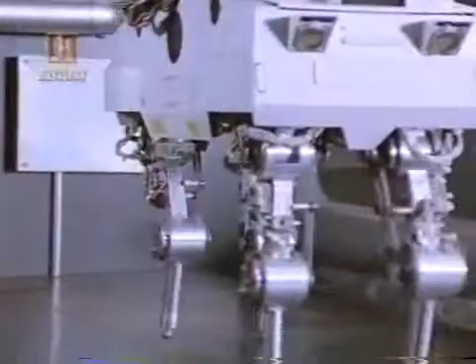Estos son los robots del siglo XX. Magníficas máquinas que han salido de las páginas de la ciencia ficción para adentrarse en nuestras vidas. Actualmente muchos robots trabajan para nosotros. En las fábricas, estos obreros de acero laboran sin descanso y desempeñan tareas de precisión, guiados por sentidos muy desarrollados, como la vista y el tacto. Otros robots se aventuran valientemente en ambientes hostiles, desempeñando trabajos desagradables, demasiado peligrosos para ser realizados por el hombre.

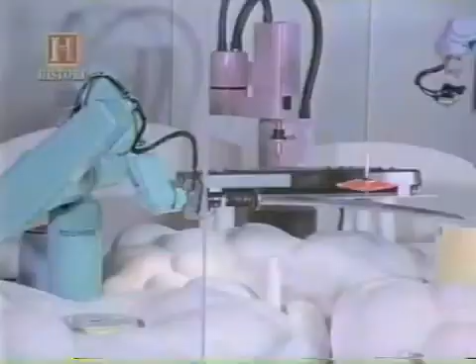Los robots también son construidos para entretenernos y asombrarnos. Cada vez más se parecen a sus creadores y actúan como ellos. A medida que los científicos continúan creando robots más inteligentes y ágiles, se hace más claro que estas inteligentes máquinas tendrán un profundo efecto en nuestro futuro.

Pensamos en los extraordinarios avances en la robótica como un producto de los recientes adelantos en la tecnología y la computación. A pesar de que la palabra no ingresó en nuestro vocabulario sino hasta los años 20, estos robots han estado evolucionando durante miles de años, a medida que el hombre se ha esforzado por crear máquinas a su propia imagen, para trabajar, entretener y para que permanezcan como servidores y no se conviertan en amos.

La primera criatura con aspecto de robot data de hace aproximadamente 5000 años, cuando los sacerdotes manipulaban fraudulentamente estatuas religiosas con movimiento en los labios y tubos parlantes para impresionar a sus asombrados seguidores.

As part of religious practice, going back thousands and thousands of years, there's normally been some kind of oracle, some sort of seer, that gives you predictions about the crops or the weather or whether the king will die. And these figures had to come at you in some sort of secretive, magical way. And the Egyptians did this with an Anubis, which is kind of a wolf-like face with an articulated jaw. The articulated jaw could be manipulated by the priest behind the Anubis, and then the priest could talk through a tube in through the Anubis's mouth.

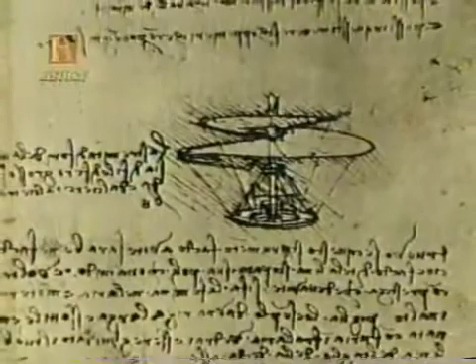En el siglo XVI, Leonardo da Vinci llenó sus libros con principios mecánicos que posibilitaban la creación de autómatas y dijo haber creado un león mecánico para el rey Luis XII. En 1580, el rabí Judah Loew creó el legendario Golem para proteger a los judíos de Praga. La historia dice que construyó una figura de barro extraído del río Moldavia y le dio vida. Sin embargo, con el tiempo el golem sufrió un ataque de locura y tuvo que ser destruido.

Por supuesto, gran parte de la historia es mito, pero el tema se convirtió en elemento permanente durante siglos de los cuentos populares sobre robots.

Para el siglo XVIII, la tecnología de los relojes y cajas musicales había sido perfeccionada, y los inventores y científicos se inspiraron en estas intrincadas máquinas. It's hard for us to imagine how amazing it was when somebody came up with a clock that could tell time by the minute. And then what else could a machine do, a mechanical device? And the imagination just went wild.

El artesano suizo Pierre-Jacques Droz y otros utilizaron estas técnicas para construir complejos autómatas que ejecutaban instrumentos musicales y realizaban pinturas. Estas ingeniosas máquinas operaban con levadores de bronce finamente labrados. Con el cambio de los levadores en los dispositivos se alteraban los movimientos del autómata, lo cual dio origen a las primeras máquinas programables.

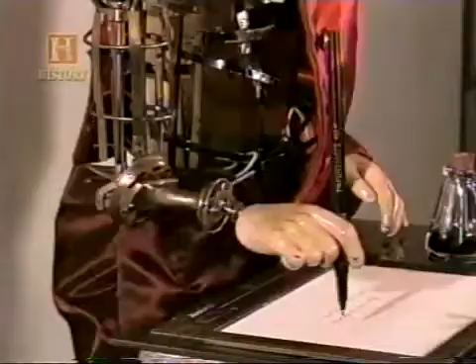This automaton is particularly interesting in that it has the largest vocabulary of any of the machines that survive, and we think the largest one of any that was ever built. It knows how to write three poems and can draw four pictures.

One of the poems is in English, but two of them are in French, because this machine was designed to travel all over Europe to sell tickets to pay for itself.

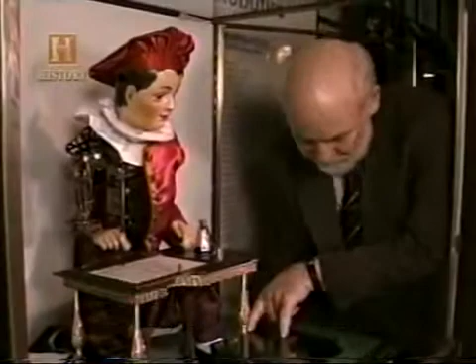It has two motors and two springs, each of which has the kick of one leg of a mule. So you add them together, and it's a full mule kick—both hind legs off the ground, flying at you.

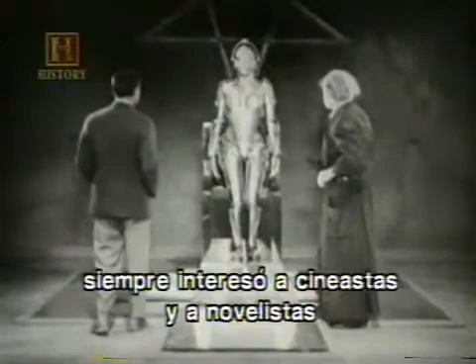The idea of a mechanical person was always interesting to the movie makers and to the storytellers, because when you have a mechanical being, it becomes soulless. And if it's soulless, then it can be ultimate evil.

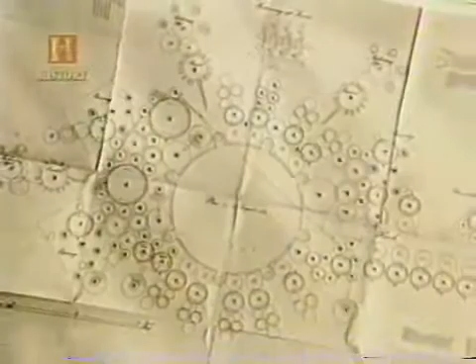En 1833, el inglés Charles Babbage construyó la primera computadora. Su motor analítico era un dispositivo mecánico trabajado con engranajes y elevadores de bronce. La máquina estaba diseñada para almacenar y calcular 1050 dígitos.

Pero esta era la época de la electricidad. El chispazo que trajo el monstruo de Frankenstein a la vida estaba entonces dando vida a autómatas realistas. En 1876, una banda automática de tamaño real interpretó un número para la entusiasmada audiencia.

Para finales de 1800, Thomas Edison utilizó la tecnología desarrollada para su nuevo fonógrafo con el fin de producir muñecas parlantes que cantaban María tenía un corderillo. El popular invento de Edison puso en marcha una nueva industria de juguetes parlantes.

Entretanto, George Moore exhibía la primera máquina bípeda. Su hombre de hojalata caminaba en círculos impulsado por un motor a vapor de medio caballo de fuerza. La visión de crear robots con forma humana estaba cada vez más cerca de la realidad.

Durante el siglo XX, los escritores y directores cinematográficos de todo el mundo continuaron con el tema de las máquinas fuera de control.

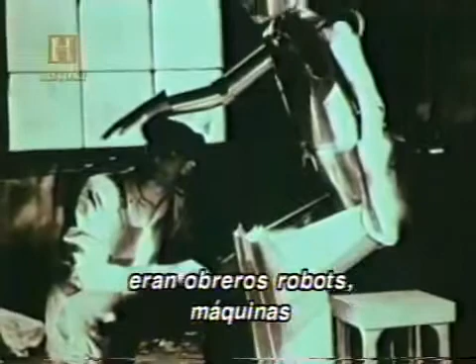Robota is the Czech word for extremely hard labor, basically slave labor. The primary characters in RUR were robot workers, machines made to work extremely hard, and the play involved them being exploited mercilessly by the factory owners, and eventually they revolted and destroyed humanity. RUR did set a tone for how the West at least views robots.

Fue entonces cuando en 1926 la película clásica de Fritz Lang, Metrópolis, se convirtió en un éxito internacional al mostrar temas similares a los de RUR.

Metropolis was the 1926 masterpiece by Fritz Lang, which took place in the year 2026, exactly 100 years from when the film was actually made. And you had the beautiful city, all the beautiful people, the beautiful architecture and everything, but really underneath the city you had these oppressed workers who were really responsible for all this lavish lifestyle.

Para controlar a los trabajadores, los dirigentes de la ciudad crearon un robot que se debía infiltrar en la fuerza laboral. Ellos dieron vida a la máquina, transfiriéndole el alma y el aspecto del personaje humano María. Una vez más, el científico maligno y loco construye un renegado y desalmado robot para esclavizar a los seres humanos. Metrópolis se convirtió en el prototipo de las películas de ciencia ficción y horror de los 50 años siguientes.

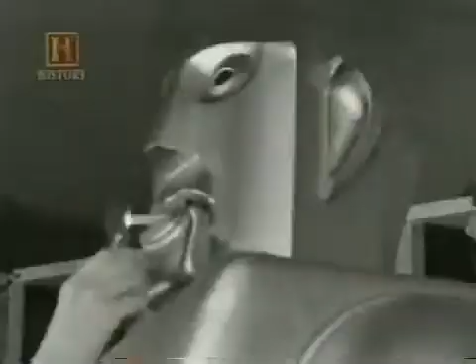El ingeniero de Westinghouse, J.M. Barnett, diseñó la máquina de 130 kilogramos para demostrar las maravillas del control eléctrico. Electro operaba con 11 motores, 48 servomotores y una serie de fotocélulas y ojos eléctricos similares a los dispositivos utilizados para abrir las puertas de manera automática.

Sin embargo, el robot no era tan inteligente como aparentaba, ya que el discurso era realizado en su mayor parte por un hombre escondido detrás de la cortina.

Quiet, please. I'm doing the talking. That's the most remarkable thing I've ever seen.

In the 1939 World's Fair, I personally saw Electro, and it was an amazing experience because we didn't know what that robot was. We thought the robot could answer our question. I asked when the oil reserves of the world would give out, and it answered my question, and it was very spectacular.

En 1940 se le adjuntó a Electro un fiel perro llamado Sparko. Ambas máquinas continuaron asombrando al público.

They were a lot of fun, and they completely captured the imagination of everyone who saw them. You have to remember, we didn't have Star Wars and Star Trek and Forbidden Planet and all that back then, in the 30s and 40s. I mean, people were just, wow. And I think it helped promote the image of science fiction and robots and the future very effectively.

La amistosa apariencia de Electro y Sparko contribuyó a popularizar una nueva y positiva visión de los robots, los cuales permanecían bajo el control humano. Este concepto se consolidó en nuestra cultura por medio de las revolucionarias obras de Isaac Asimov.

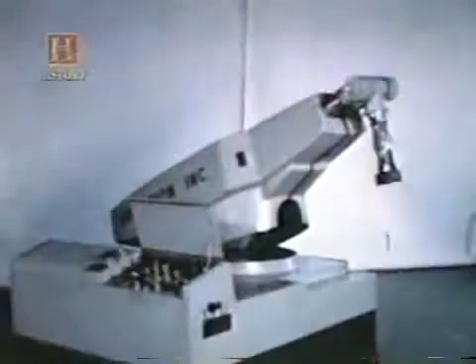Si el robot industrial tiene un árbol genealógico, sus raíces están firmemente plantadas con este hombre. George Devol es conocido como el abuelo de la robótica. Esta es su patente, registrada en 1954, el anteproyecto para la máquina que revolucionaría la historia.

This is the kind of a job that a man normally doesn't like to do. It's really terribly hot in those forging operations.

Devol, un prolífico inventor, también responsable por el código de barras y la puerta eléctrica, se asoció con el ingeniero Joe Engelberger, ahora conocido como el padre de la robótica. Joe relata cómo todo comenzó en un cóctel.

We got talking in a corner, and I think we also got into our cups. Talking about it, I said, gee, that sounds like a very good idea. I think the patent makes sense to me. What are you doing with it? And he said, well, no one's paying any attention to me. So I said, let me have a crack at it, let me see if I can't find the financing. And in the cold gray dawn with a hangover, it still looked like a pretty good idea.

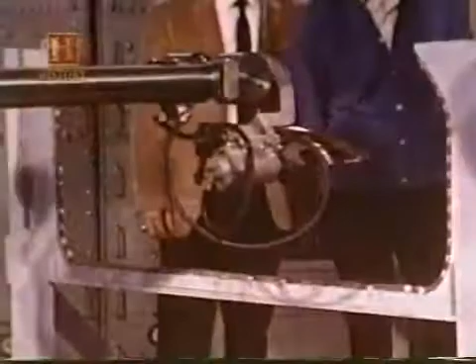Ambos hombres tenían fe en la idea, pero resultó muy difícil convencer a las empresas para que financiaran el proyecto. When we built the first industrial robot, to get the financing, I visited 46 different companies before I could find someone who believed it was even possible to do such a thing.

A pesar de que llevó años de trabajo y recaudación de fondos, el anteproyecto de George Devol fue llevado a la vida robótica en 1961. La nueva compañía fue llamada Unimation y el robot Unimate.

Automation's newest contribution to man. This jack-of-all-trades robot is called Unimate, and it handles dull, difficult, or dangerous jobs with equal aplomb.

Ese mismo año, la General Motors adquirió el primer Unimate y lo colocó en una planta de Nueva Jersey para manejar las piezas incandescentes de una máquina de fundición. La automatización no era nueva para la industria automotriz, pero esto era algo diferente. El Unimate creó la definición del robot industrial.

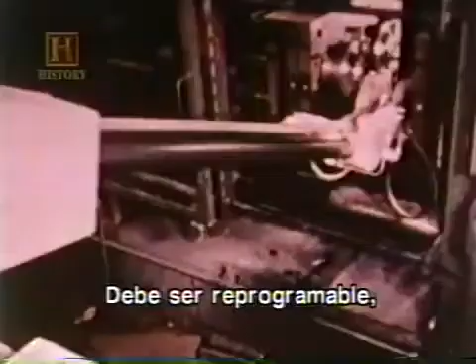An industrial robot is something that has at least 3 degrees of freedom, which means 3 axes that can move independently. It has to be reprogrammable, and it has to be able to perform different tasks. And that's the universally agreed definition today.

The original Unimate had an awful lot of the major qualities that all industrial robots have today. It had to have a memory, it had to remember up to 100 different steps. There's 100 different things in a row it could do.

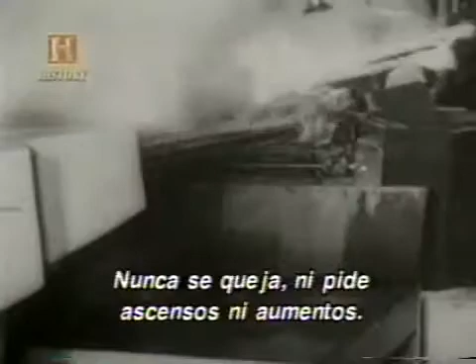He has muscle, can pick up 75 pounds, and can stand extreme heat, cold, noxious odors, toxic gases, and radiation. He never complains, asks for a promotion, or demands a pay raise. He doesn't break, bend, or burn, and should make some other Unimate a perfect husband. Or maybe wife?

Esta era una máquina primitiva que pesaba 1000 kilogramos, impulsada por medios hidráulicos, con la memoria almacenada en una bobina magnética de metal. Su sistema nervioso era operado por retroalimentación o servomecanismos, los cuales miden dónde se encuentra el robot en el espacio. Cuando éste alcanza su punto programado, entonces ejecuta su próxima maniobra.

Otra innovación fue el efector terminal, la mano del robot. Esta es la parte de la máquina que se relaciona con sus alrededores. Cada una es diseñada para realizar un trabajo específico, como soldar, perforar, pintar y asir.

End effector is another word for tooling. Now, the tooling can get pretty sophisticated because some of the tooling has sensors built into the clamp, let's say, that will allow it to exert just so much pressure on something.

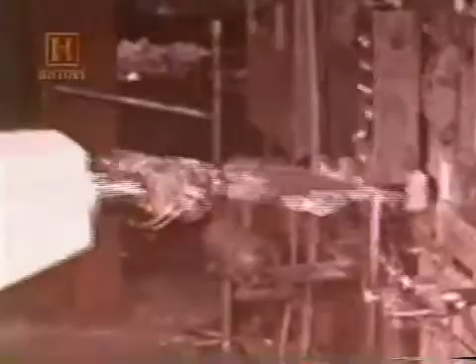Sin embargo, aparte de General Motors, los compradores de los nuevos robots eran escasos. If you don't understand something, and to try to get a normal businessman to understand a robot, he thought you're talking about science fiction or something like that.

Los cuerpos directivos se mostraban escépticos, los compradores temerosos. Los ejecutivos corporativos creían que los robots no funcionarían, mientras que los empleados temían que trabajaran demasiado bien y que los reemplazaran. No obstante, los robots realizaban en especial los trabajos que la gente no quería desempeñar. De hecho, los robots generaron empleo. Era trabajo de humanos diseñarlos, construirlos, operarlos y repararlos.

So they're able to use the kind of brain power that they have. Like one of the people that went to one of our classes learning how to program robots came out of it and said, gee, now I can finally use my brains for this company I've been working for 20 years instead of just my muscles.

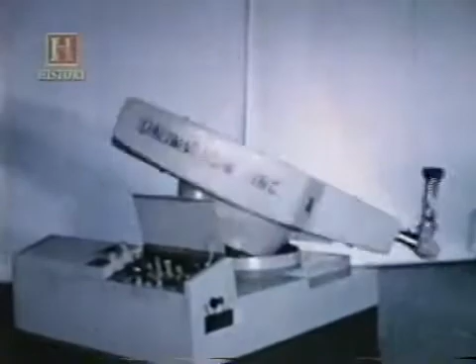Para mediados de los 60, incluso los sindicatos laborales respaldaron a los robots y reconocieron el inevitable incremento en la productividad. Aún así, el Unimate original, con un precio de $18,000, siguió teniendo dificultades de venta. What we did to get people started, we would rent the robot.

You'd hire it like a person. And we would say, at that time, it's so many dollars an hour—I think $6 an hour for the first shift, and $3 an hour for the second shift. So your labor gets cheaper. The robot had one advantage immediately: it could work 3 shifts, or 24 hours a day.

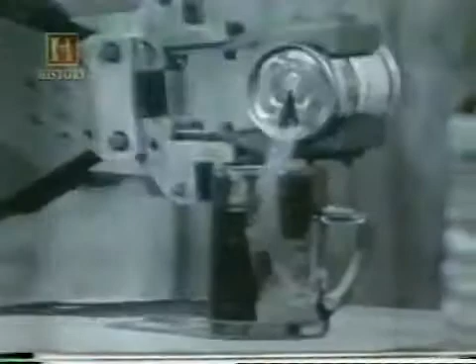And three, it could lead the orchestra. Now, what he's doing now is to program what he's going to have the machine do. He's putting this information into the machine. And that gave me a chance to show how the arm moved with a baton. Take it on the downbeat.

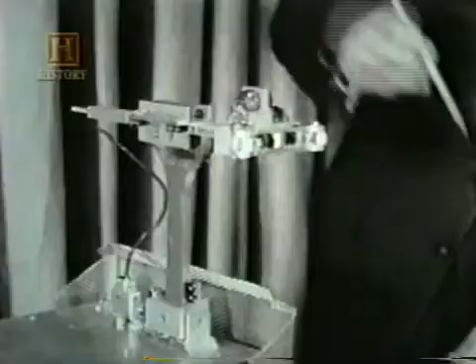During the working day, most office doors are left open. It is desirable not to allow the device to enter these offices, and it must therefore sense the door jamb, bridge the open door, and regain acquisition with the wall.

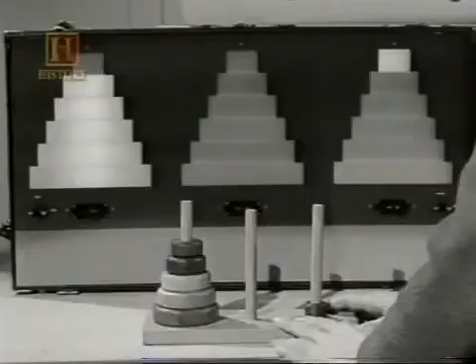Esta conferencia permitió a los investigadores de la IA del Instituto Tecnológico de Massachusetts sentar las bases para las máquinas pensantes computarizadas. Diseñaron programas para que pudieran jugar ajedrez, reconocer formas distintas y resolver problemas de lógica.

Claude Shannon realizó un extraordinario experimento llamado el ratón en el laberinto, que significó un gran aprendizaje. Guiado por un imán eléctrico motorizado, su trayectoria era registrada por una computadora que solo conservaba las partes exitosas de la travesía. En su segundo intento, el ratón encontraba su objetivo en una fracción del tiempo anterior.

En 1963, McCarthy se trasladó a la Universidad de Stanford, donde estableció el Laboratorio de Inteligencia Artificial.

One of the major things that we undertook to do was robotics, and in particular computer vision in connection with robotics.

Los investigadores de la IA consideraban que, para que la ejecución de los programas se asemejara más a las actitudes humanas, necesitaba ser combinada con accesorios que permitieran ver, escuchar y sentir. Los brazos del robot anexados a cámaras de televisión podían desempeñar tareas muy rudimentarias, tales como mover bloques de colores.

Sin embargo, una desagradable paradoja se hacía evidente. Si bien una computadora con inteligencia artificial podía fácilmente sobrepasar el desempeño humano en cálculo, cuando era acoplada a un accesorio mecánico, escasamente podía alcanzar la coordinación entre la mano y el ojo de un niño que comienza a gatear. Otorgar a un robot las percepciones sensoriales básicas que nuestro cerebro realiza sin esfuerzo es una tarea muy dificultosa.

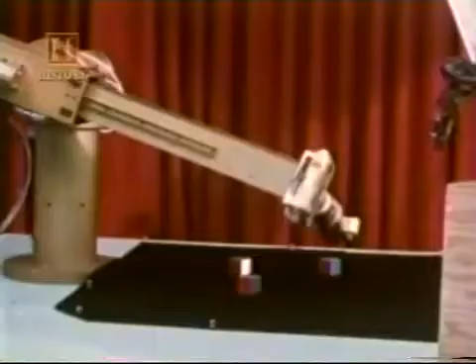In hindsight, of course, it's obvious that those are actually the hard parts, because those are the things that human beings have done as a life or death matter for most of our evolution.

Sin embargo, mientras otros laboratorios luchaban con estos problemas, el Laboratorio de Investigaciones de Stanford hizo historia en 1969 al crear a Shakey, el primer robot móvil casi racional.

Con una altura de 1,50 m, Shakey era guiado por 2 motores. Tenía una cámara de televisión y una radio conectada a una computadora fuera de borda. Podía transportarse y mantener el curso de su posición y velocidad contando las revoluciones de los engranajes.

We wanted a system to be able to learn a little bit about its world, make a map, use that map to figure out how to make motion throughout its world, how to move.

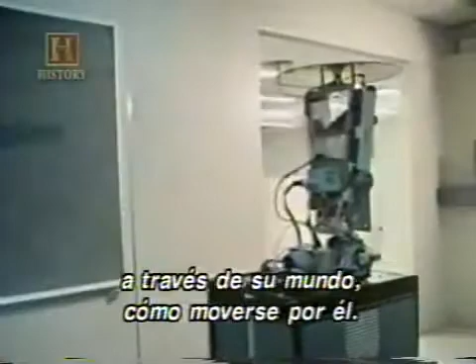Dado que carecía de un sistema de visión compleja, el mundo de Shakey era un ambiente de simples formas geométricas, que deliberadamente hacía más fácil el desempeño de funciones más complejas de aprendizaje y planificación.

Shakey podía realizar tareas simples, tales como mover un bloque de un lugar a otro. Desde un comando general, Shakey podía estimar las condiciones del mundo a su alrededor y deducir lo que necesitaba hacer para completar la tarea.

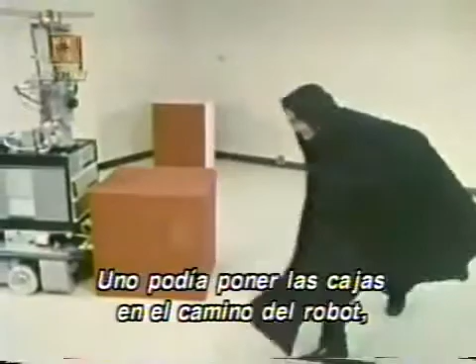And in fact, it worked very well. You could go in and move the boxes while the robot was performing some plan. It would recognize that things were going wrong. It would replan, and it would figure out what to do again.

Just a phenomenal idea. We put together a component in the area of computer vision, in the area of planning, and we put these together into a system that functioned smoothly, all as one integrated device. I think that was probably the first time that so many different components, so many different parts of artificial intelligence were put together into one system.

Pero a pesar de que el cerebro de Shakey era impresionante, la espontaneidad no era su punto fuerte. Cada movimiento tardaba más de 1 hora en ser computado y aún así existían grandes probabilidades de fallar.

A principios de los 70, la Universidad de Stanford confrontaba problemas con su vehículo robótico, pues no podían mantenerlo bajo control.

El laboratorio de inteligencia artificial estaba experimentando con la famosa carreta de Stanford, un robot móvil, el cual, a diferencia de Shakey, podía ver y transportarse en cualquier ambiente.

The cart had on it a television camera, and we illegally used an unused television channel, and we used a model airplane type controller to get the information back to the cart.

De 1971 a 1979, los estudiantes de la IA, como Hans Moravec, diseñaron programas que desarrollaron la carreta a partir de un vehículo débilmente consciente para convertirla en una máquina capaz de trazar su trayectoria gracias a la configuración del horizonte.

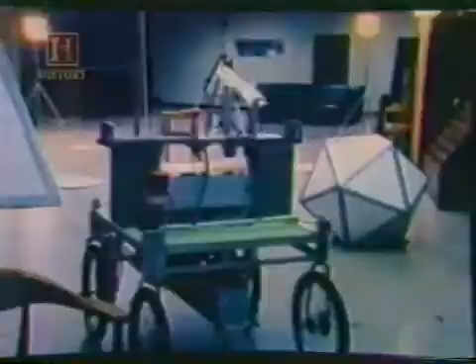La carreta tenía una cámara que tomaba una serie de 9 imágenes, a partir de las cuales medía la distancia de un objeto, utilizando 9 coordenadas separadas.

Su desempeño, sin embargo, aún no era perfecto. Un buen día, en 1979, cruzó un espacio obstruido de 30 metros, aunque le tomó 5 horas hacerlo.

Los investigadores de la IA se desconcertaban constantemente ante la amarga realidad de la tecnología actual. No obstante, los adelantos en el procesamiento de computadoras produjo avances.

Flakey, el hijo de Shakey, fue creado en el SRI a finales de los años 70. Dando vueltas por el SRI como un pariente lejano de Arturito, Flakey incluso podía interpretar pequeñas órdenes de su amo y ejecutar una acción apropiada.

I want Leslie to have the bagel. Enter. I want Leslie to have the bagel. Finished successfully parsing sentence.

El dueño solo dijo que quería que Leslie tuviera una rosquilla. Flakey razonó que debía encontrarla y entregarla.

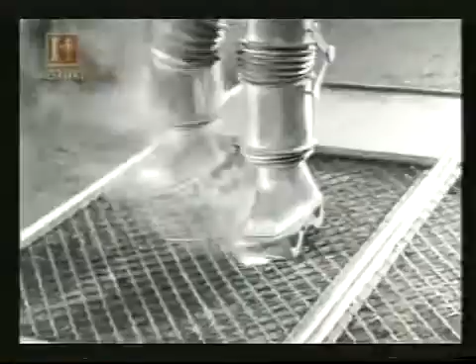Los hombres mecánicos construidos durante este periodo, como el robot del ingeniero suizo Peter Stern, eran poco más que sofisticados autómatas, parientes cercanos de Electro y Sparko, creados en décadas anteriores.

Sin embargo, poco a poco los investigadores perseguían el sueño de un robot que fuera semejante a los humanos. En la década de los 50 se crearon brazos mecánicos para manejar isótopos radiactivos.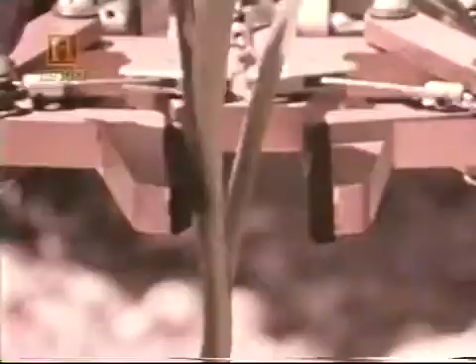SAM fue construido para la NASA para operar en sitios de pruebas radiactivas y en el espacio exterior. Pero estas máquinas eran teleoperadas y solo reaccionaban al control humano.

Fue entonces cuando los científicos de Stanford y del Instituto Tecnológico de Massachusetts acoplaron esta destreza mecánica a los nuevos avances en inteligencia artificial y sistemas de visión.

Los robots experimentales como la mano de Salisbury dieron a las máquinas un refinado sentido del tacto que les permitía manipular objetos pequeños y delicados.

A principios de la década de los 70, algunos de los graduados de Stanford reconocieron el potencial de estos adelantos para la industria privada y fundaron una compañía encargada de fabricar y distribuir estos inteligentes brazos de robot.

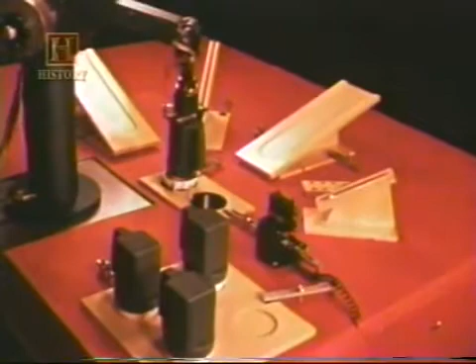Los socios deseaban llevar su invento al mercado industrial y darle al Unimate un cerebro.

Fue entonces cuando, al igual que Joe Engelberger, Vic Scheinman llevó su espectáculo robótico de un lado a otro. Irónicamente, Engelberger lo encontró en la puerta de una exhibición comercial en Chicago en 1975.

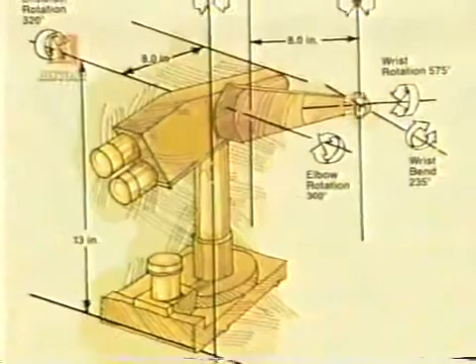The Puma was an industrial version of the Vicarm technology. It had incorporated into its base an LSI-11 computer, a small microcomputer. It could move to a repeatability of 0.004 of an inch, about the thickness of a sheet of paper. That early computer had only 8 kilobytes of memory in it.

And I remember my partner, Bruce Shimano, commenting to me that he didn't think he'd ever be able to develop enough software to fill 8 kilobytes of memory.

A diferencia del macizo Unimate, controlado hidráulicamente, el Puma era un pequeño robot eléctrico.

The movement to an electric motor to help drive the robots really was a key point, and that was a benchmark time, and it created a lot of new application interest areas and expanded the industry quite dramatically, going from hydraulics to electric.

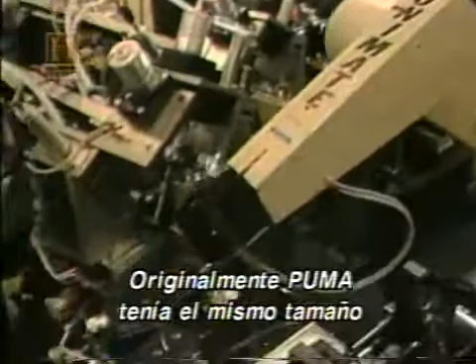Originally, the Puma was sized to be about the same size as a person, and the idea was that it would be very difficult to get the workforce and the plants to accept this kind of technology.

If it was sized about the size of a human, you could imagine using robots in some places to perform the work, and other places where people could perform the work, and if there were problems, you could backfill that technology with people.

Las ventas de Puma rápidamente se incrementaron alrededor de $35 millones al año y dieron origen a una floreciente industria de robots industriales inteligentes.

Pronto los sistemas de visión fueron mejorados, lo cual le permitía a los robots reconocer y manipular partes colocadas aleatoriamente en una correa transportadora móvil. A los robots se les enseñaba esta extraordinaria tarea mostrando primero las piezas al lente de la cámara de video de la máquina.

La computadora memorizaba esa forma y buscaba una pareja a medida que las partes descendían por la correa transportadora. Para entonces, los robots habían alcanzado una inteligencia equivalente a la de un grillo.

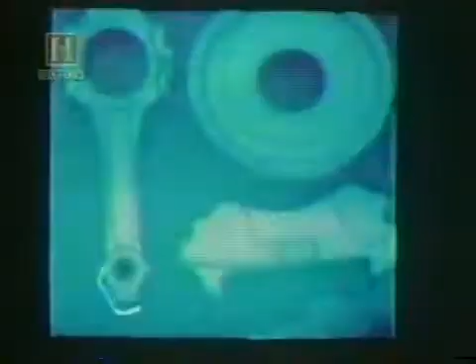One application in the mid-'80s was in the food industry, where robots were picking up candy that was coming down a moving conveyor belt, or cookies that were coming down a moving conveyor belt, using machine vision to find the candy or the cookie, then picking it up and putting it into an appropriate package.

Durante ese periodo, la General Motors adquirió casi la mitad de los robots industriales fabricados en Estados Unidos y decidió formar su propia división de robótica.

Westinghouse también entró en el juego y compró a Unimation. Carlisle y Shimano no estaban interesados en convertirse en una especie corporativa convencional, por lo que formaron su propia compañía llamada Adept.

Adept se especializó en mejorar la visión de las máquinas e incorporaron una nueva tecnología mecánica denominada brazos robóticos de conducción directa.

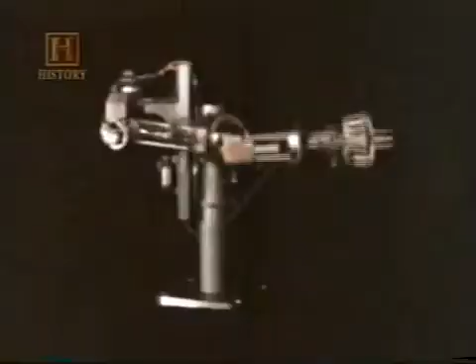Los brazos de los robots más antiguos tenían grandes motores localizados en la base de la máquina y sistemas de alambres, poleas y engranajes para controlar las articulaciones. El funcionamiento de estos brazos les impedía ejecutar movimientos precisos.

Sin embargo, el brazo de conducción directa poseía pequeños pero potentes motores eléctricos en cada articulación del brazo, motores que generaban gran torsión.

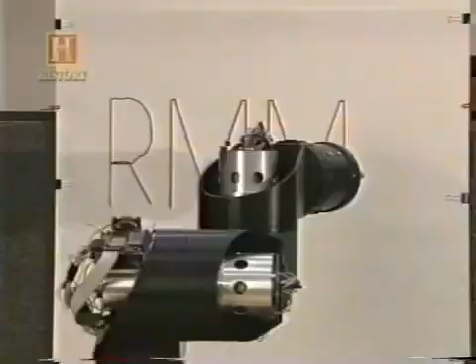Creados originalmente en la Universidad de Carnegie Mellon por Takeo Kanade, los brazos de conducción directa representaron un gigantesco paso en términos de velocidad, calidad de funcionamiento y precisión. La repetición de los movimientos fue reducida a aproximadamente un tercio del espesor de una hoja de papel.

Actualmente, Adept es una de las pocas compañías norteamericanas de robots industriales con éxito. General Motors y Westinghouse se han retirado, y la industria es dominada por las compañías japonesas, donde el mercado de robots es 5 veces más grande que en Norteamérica.

Las compañías japonesas tales como Fanuc Robotics tienen sucursales alrededor del mundo. Y a pesar de que estas compañías no inventaron los robots industriales, han añadido altos niveles de eficiencia a la tecnología.

They saw something good. They don't worry about whether it was invented there or not. They figure out how to use it most effectively for their objectives.

Their most recent motor factory has 200 robots and 40 operators in the plant, and is capable of running overnight, unmanned, actually for a full 3 to 4 day weekend.

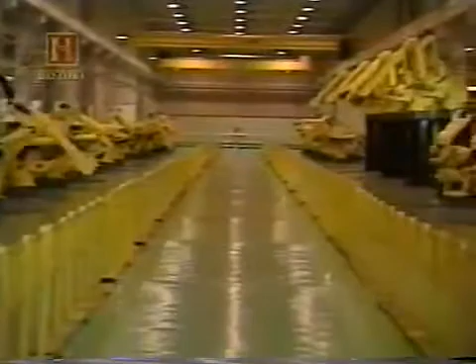En los cuarteles generales de Fanuc hay incluso robots construyendo otros robots. Los japoneses han convertido al otrora desmañado robot en una diestra herramienta increíblemente similar a una extremidad humana.

Ellos muestran orgullosamente las capacidades de sus máquinas en impresionantes exhibiciones, robots balanceando peonzas en el filo de una espada.

O coordinando 2 brazos en una exhibición de arreglos florales.

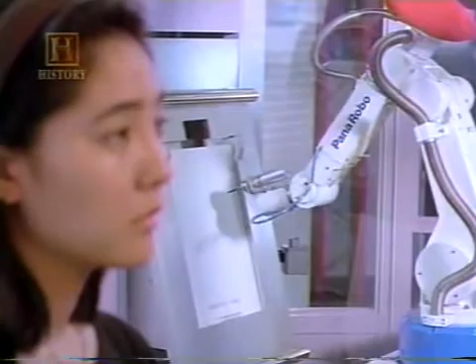O los ágiles dedos de un robot manipulando un pequeño tornillo, o incluso un brazo de robot utilizando su sistema de visión para dibujar retratos extraordinariamente exactos. La boina es opcional.

El siguiente reto era trasladar a los robots del taller de manufactura al espacio exterior. Para finales de los 70, los robots se habían convertido en elementos permanentes dentro de laboratorios y talleres de manufactura. Sin embargo, estos eran ambientes controlados, lo cual no determinaba con precisión si los robots podían asumir los retos del mundo real.

En la Universidad de Carnegie Mellon, en Pittsburgh, los científicos abordaron el complejo problema que significaba programar los robots para sentir, planificar y pensar en el mundo real.

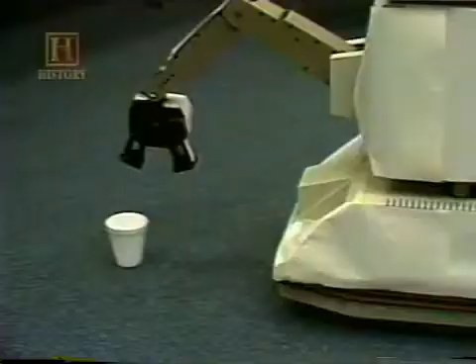La mayoría de los fondos para la robótica estuvieron destinados hacia la investigación básica dirigida a resolver los problemas teóricos. Pero todo esto estaba a punto de cambiar.

En una pequeña comunidad agrícola, a menos de 320 kilómetros de Carnegie Mellon, el núcleo del reactor número 2 de las instalaciones nucleares de la isla de las 3 millas sufrió una fusión casi catastrófica. Los sedimentos contaminados y los niveles desconocidos de radiactividad convirtieron cualquier exploración humana en potencialmente mortal.

La isla de las 3 millas acudió a Carnegie Mellon por ayuda, lo que dio origen a la industria de los robots de campo. 3 Mile Island was a galvanizing event in our personal history. It was the opportunity to take machines full term, not just ideas and laboratory curiosities, but full up working machines that would go into that accident and perform serious work.

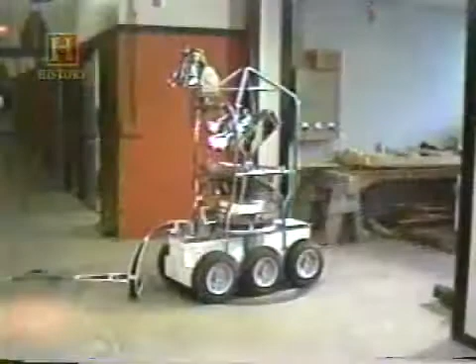El primer robot en ingresar al área de desastre fue el vehículo de reconocimiento remoto o VRR. El robot de 6 ruedas portaba 2 cámaras a bordo, sensores infrarrojos y de radiación y un conjunto de equipos fotográficos. El VRR fue fabricado con suficiente estabilidad para que no se volcara sobre el pozo de residuos tóxicos y con las dimensiones que le permitieran cruzar por las puertas existentes en el núcleo del reactor.

Fue entonces cuando en noviembre de 1984 el VRR realizó una riesgosa incursión en la zona de peligro de la isla de las 3 millas.

When the reconnaissance vehicle went into the containment building for the first time was high drama. We were able to view the surroundings, the conditions, the flooding, the damage. But more importantly, an event frozen in time where lunchboxes and watches and ladders were just abandoned as people left. And it was truly special since this machine was the first thing to have gone in, and to this day, the only thing to have gone into the basement.

Los científicos sabían que uno de los aspectos más importantes al enviar un robot a la zona de fusión era traerlo de regreso. De otra manera, solo hubieran añadido varias toneladas de desechos nucleares al problema.

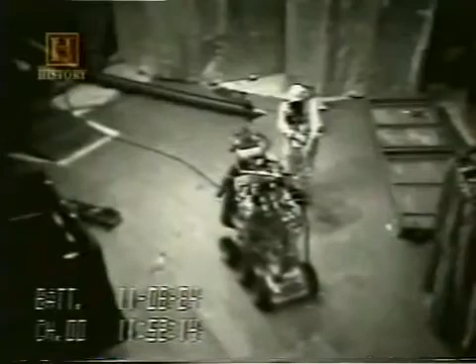Por esta razón, el VRR era capaz de trasladarse de regreso a un elevador, acoplarse a un gancho y ser levantado hacia un área segura por encima de los sedimentos tóxicos. Asimismo, se añadió una correa de gran resistencia para establecer comunicación continua y, de ser necesario, para funcionar como un plan de escape.

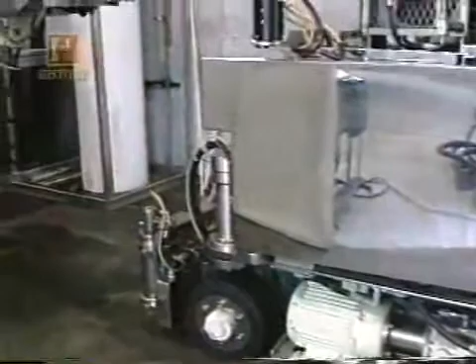Luego se creó un gigante de 5.000 kilos conocido como el caballo de trabajo, cuya tarea era desmontar las áreas contaminadas. Este poderoso robot tenía la habilidad de asir, cortar y alcanzar alturas de más de 9 metros. A pesar de que nunca fue puesto a funcionar en la isla de las 3 millas, el caballo de trabajo fue parte de lo que Whittaker comprendió era un mercado emergente para sus robots de campo: la realización de trabajos demasiado peligrosos para los humanos.

In the earliest going, before the existence of field robots, there were no research contracts. We created opportunities from hazard and operated as technical ambulance chasers.

Una nueva industria había nacido. Pero aún así, estas máquinas lucían y actuaban de un modo bastante alejado a las concepciones populares de los vistosos robots humanoides.

A friend of mine came to visit, and I took her on a tour, and she walked around and she said, well, nothing has a head. She really wanted to see a face and arms and the whole bit on the robotics, and was kind of surprised when they look like trucks and they look like tractors and they look like Jeeps.

I think there's a certain artistic movement in robotics to build some human-like robotics. And certainly the ultimate in robotics would be duplicating a human. In our work, that's not necessary. We think humans can do good human things, and our machines are designed to assist rather than replace the human individual.

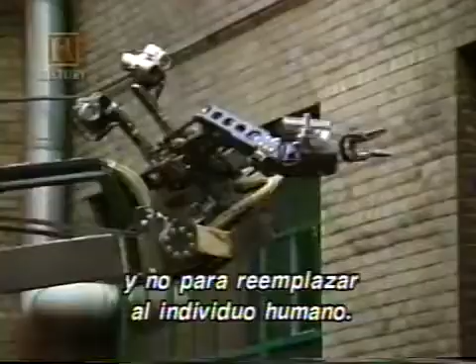En 1988, Whittaker fundó una compañía llamada Red Zone, Zona Roja, para construir robots destinados a realizar labores peligrosas. Los diseñadores de Red Zone programaban los robots para desempeñar tareas específicas, y las máquinas usualmente tomaban formas inusuales.

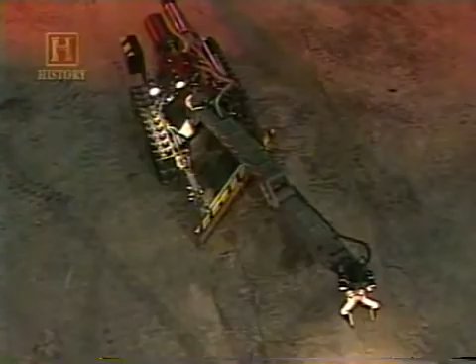For robots that will work inside tanks, inside pipes, inside mines and caves, there are two approaches. One is to forcefully make openings large enough to enter. The other is to collapse, become small enough to go through existing openings.

This particular robot folds like a parallelogram, so it can go down a 22-inch diameter opening, typical of the kind of openings left in a lot of these nuclear waste tanks. So as the bulldozer folds, it goes down in the tank, opens back up, and then it can move waste around in the tank to the clean-out sumps and so forth.

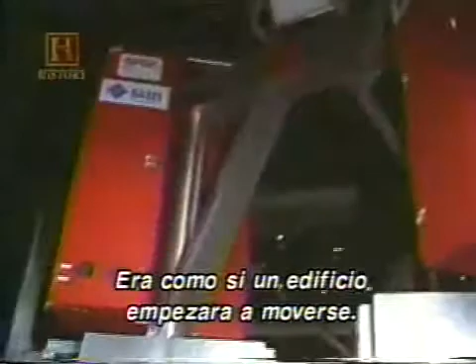The first couple times we moved it, it was pretty scary. It's almost like a building next to you is getting ready to shift. Almost all of these things, when you first start them up, you don't know what they're going to do, so you sort of put them in a condition where they're not going to hurt anybody, and you stand back.

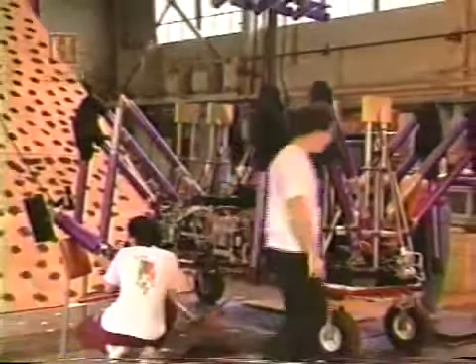Antes de emprender el viaje de 21.000 kilómetros hasta el continente blanco, el robot fue sometido a rigurosas pruebas en una fábrica de acero abandonada en Pittsburgh.

We deployed Dante onto the volcano in thousands of little pieces and parts, with 250,000 lines of fresh software, new sensors, new physical form. In tents at 10,000 feet, we assembled it piece by piece, downloaded software, brought it to life. I was amazed this thing walked.

Al final fue el frío y no el calor lo que aniquiló a Dante. El cableado y los circuitos creados para resistir el calor extremo de un volcán activo fueron incapaces de sobrevivir al frío severo que reinaba en la cima de la montaña. Dante fracasó después de solo 3 pasos.

Los fabricantes de Dante regresaron a la mesa de dibujo y rediseñaron su creación. Nuevas configuraciones de las piernas, colocación de las articulaciones y nuevos metales hicieron que las piernas de Dante 2 fueran 3 veces más fuertes que las de su predecesor.

Dante 2 fue enviado al Monte Spurr, un volcán en Alaska. Paso a paso transitó por el terreno desmenuzado y soportó una andanada de rocas que caían a medida que hacía su descenso.

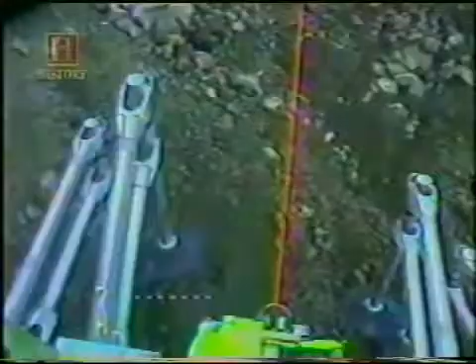Los sensores de Dante permitieron a los investigadores realizar lecturas sísmicas, observar imágenes de video e incluso oler el contenido químico del aire. Todo desde el puesto de comando en Anchorage, a más de 300 kilómetros.

Finalmente, las dificultades del terreno y los fuertes vientos se combinaron para vencer a Dante 2, robot que, por razones de seguridad, tuvo que ser rescatado por un helicóptero.

Red Whittaker y su equipo de robots de campo habían ayudado a construir una industria de robots que nos asistían cuando nuestra propia tecnología nos fallaba. Ellos habían examinado reactores nucleares y volcanes peligrosos. Sin embargo, otros científicos están tratando con un asunto aún más problemático: el tráfico en las horas de mayor afluencia.

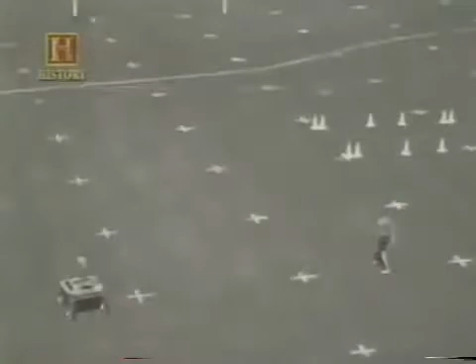Como un infante aprendiendo a caminar, los primeros pasos de los robots han sido poco diestros. No obstante, al igual que un adolescente aprendiendo a conducir, la verdadera libertad solo llegará cuando los robots puedan recorrer largas distancias por sí mismos. En 1979, Hans Moravec trajo los conocimientos desde su centro de operaciones en Stanford hasta Pittsburgh y se unió al equipo de la Universidad de Carnegie Mellon para crear robots móviles.

Los investigadores de Carnegie Mellon habían estado trabajando en su propio proyecto denominado la Plataforma Móvil Inteligente, o IMP. Este navegante de pasadizos tomó prestada la tecnología autoenfocable de sonar de las cámaras Polaroid para delinear su mundo. Exploraba su ambiente como lo haría un faro, pero el sonar demostró tener severas limitaciones.

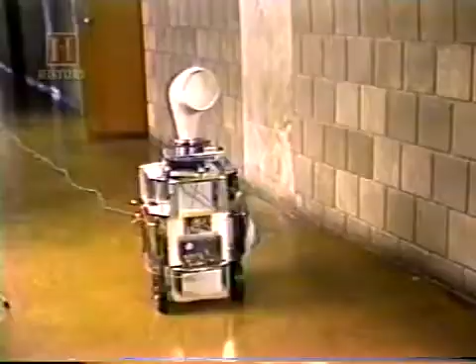It can't see very far away. It has a problem if you have a smooth surface: the sonar just hits the smooth surface and bounces and never comes back. And so you may think that there's nothing there when in fact there's a nice smooth wall.

El próximo proyecto de Moravec con el equipo de Carnegie Mellon, llamado Urano, utilizó ruedas especialmente diseñadas para solventar algunos problemas técnicos. Uranus exhibits that unique ability to move instantaneously in all directions, not just like we drive a car, but also to move laterally, spin on a dime, or to pirouette so it could turn while moving.

And we couldn't solve the parallel parking problem, so we made machines that could move like chess pieces that could execute the kind of simple plans and models that we could create.

Con el advenimiento de los microcomputadores a mediados de los 80, los científicos soñaban con crear finalmente un robot móvil completamente autónomo. Pero incluso utilizando la tecnología más moderna, se requería de un vehículo especialmente equipado de nombre NavLab 1.

El vehículo del robot necesitaba un motor separado de 4 cilindros para impulsar 4 estaciones de trabajo computarizado, una supercomputadora, sus sistemas de visión y un acondicionador de aire. Los estudiantes se sentaron en la retaguardia para controlar el equipo, pero el gran vehículo se estaba conduciendo a sí mismo.

Al principio, pocas personas creían que el NavLab podía viajar a más de 8 kilómetros por hora para luego detenerse. The NavLab 1 typically ran at about a walking speed.

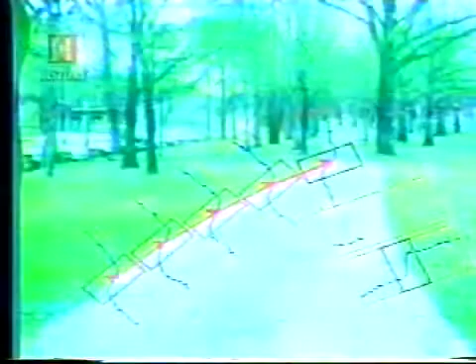El carro fue reemplazado por el NavLab 2, un vehículo del ejército de Estados Unidos equipado con un nuevo e impresionante sistema de visión conocido como ALVINN. ALVINN es lo que se llama un programa de redes neurales y es realmente capaz de aprender a conducir. ALVINN visualiza el camino a través de una cámara de video mientras una persona va conduciendo. Luego de 5 minutos de este proceso de aprendizaje, ALVINN se hace cargo y continúa conduciendo por sí mismo.

El NavLab 2 con el tiempo alcanzó una velocidad de conducción de 88 kilómetros por hora. Fue entonces cuando en 1995 el equipo de NavLab decidió intentar con una nueva gama de vehículos robot.

We said, look, rather than putting all the processing power and all the electrical power on board that we think we might possibly need, let's go the other direction. Let's figure out how much power is available just through the cigarette lighter, and let's limit our processing to whatever we can get off of the vehicle as unmodified.

El NavLab 5 era una minivan, completada con una computadora portátil y múltiples cámaras de televisión para visión frontal, lateral y posterior. ALVINN fue reemplazado por un sistema de redes neurales más sofisticado, Ralph, el cual podía manejar cambios de canal y tráfico más pesado.

En 1996, Thorpe y sus estudiantes enviaron al NavLab 5 a la expedición sin manos a través de Norteamérica, que realizó la travesía desde Washington, D.C. a California. Ralph condujo durante un 98,8% del viaje.

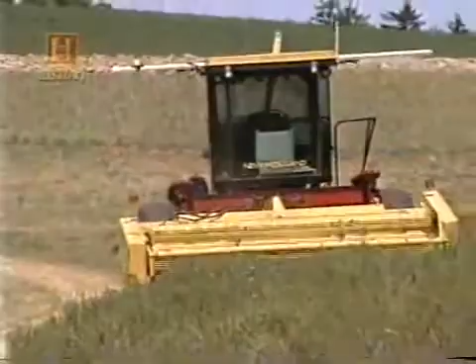La misma tecnología del NavLab también ha sido empleada por otras industrias como las excavaciones y la agricultura. Algunos tractores ahora pueden distinguir entre cosechas cortadas y las que aún no lo están y cosechar campos completos sin un operador.

Y algún día no muy lejano, helicópteros automáticos serán capaces de realizar operaciones de búsqueda y rescate con mayor eficiencia que los humanos.

Nomad fue diseñado para operar de manera autónoma durante largos periodos, transitar por terrenos desconocidos e identificar meteoritos y otras muestras de roca. El vehículo trazó su propia trayectoria en la mayor parte de sus 6 semanas en el desierto.

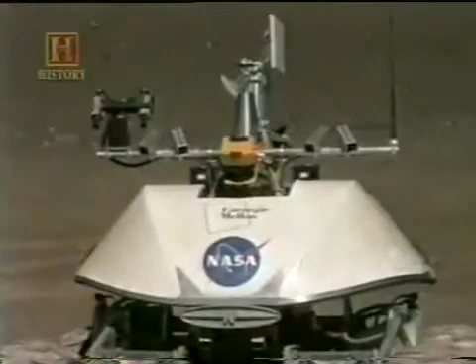Las instrucciones que recibía generalmente provenían de salones de clase de todo el mundo, los cuales fueron proveídos para comunicarse con el robot.

Nomad estaba capacitado para operar de manera similar al Pathfinder de la NASA, diseñado por el Laboratorio de Propulsión a Chorro.

Pathfinder envió sorprendentes imágenes del planeta rojo y estimuló el interés de la nueva generación en las exploraciones espaciales y los robots.

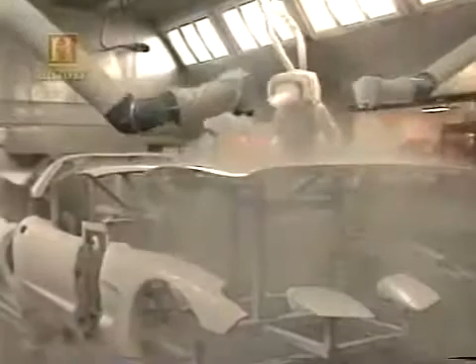La evolución de los robots los transformó de experimentos primitivos en máquinas extraordinariamente capacitadas. Los robots modernos fácilmente alcanzan y superan cualquier definición de libro de texto. Son programables y pueden llevar a cabo diferentes tareas.

Pueden funcionar de manera autónoma e interactuar con su ambiente. Actualmente, aún los robots de juguete son más complejos y funcionales que los robots más avanzados de hace 50 años.

Pero pese a lo impresionante que pueden llegar a ser, hay un elemento faltante, y es que la mayoría de los robots exitosos no lucen como los robots de nuestras fantasías.

¿Qué sucedió con nuestro sueño de hace cientos de años? El de crear una máquina a nuestra propia imagen que fuera nuestro obediente servidor.

The ultimate in do-it-yourself project from the home workshop of 16-year-old Kurt Golden, Arthur the Robot.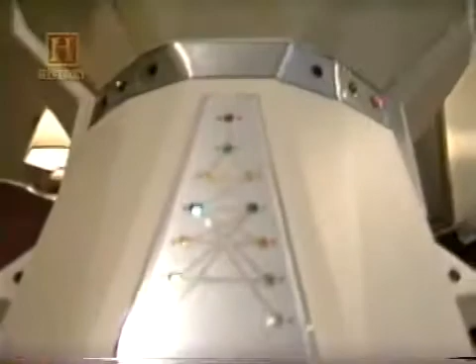Your humble servant. Bob, get me a beer.

What Bob would do would be a somewhat more amusing companion than a dog or a cat. Then you can go into what I'd call basic fetch activities. Bring me a Coke, bring me my newspaper, bring me my slippers, that sort of thing.

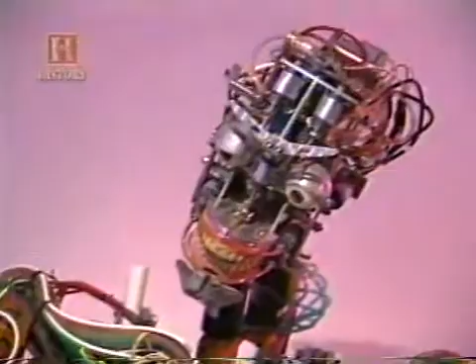I think I know now what they mean by the expression, if looks could kill.

You actually synchronize the soundtrack with the computer. They slave each other, so they always work together. Then you start putting layers on top. You start maybe with the mouth, synchronizing it to the soundtrack. Then you add facial expressions, blinking. Then you add the head turn and the eyes. You always have to make sure the eyes are leading the head, otherwise it will look really robotic. To make something believable, all the movements have to have the right sequence to look alive.

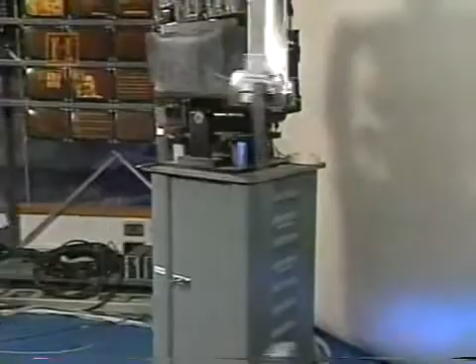A lot of us have seen Star Trek: The Next Generation with Commander Data, the android robot, which is very human-like, except he doesn't quite have emotions. That's our ultimate goal - we're trying to figure out how to build a robot that is that capable. It's going to take a long, long time. It may take longer than 400 years. This is some of the first steps towards that goal.

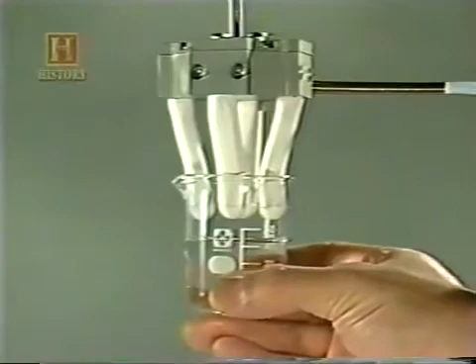And the fourth generation robot is human-like, and expect those perhaps around 2040. At that point, we're pretty much out of work, because the robots can do everything we can do, better and cheaper.